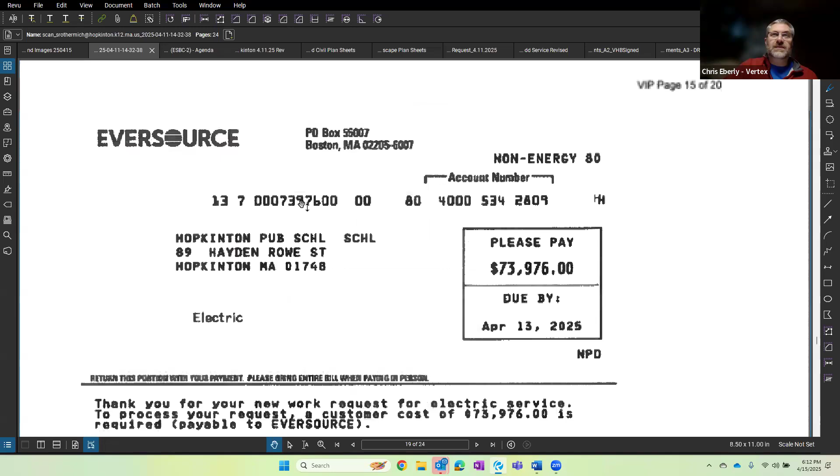And I'm just going to point out what I really enjoy is that this looks exactly like the Eversource bill we all get at our house, except obviously, hopefully, this is a larger number than most people get at their house. It literally looks exactly like an Eversource bill. It always shocks me.

Of course. So the process for starting utility service with Eversource is that you establish a work order number, you meet certain requirements based on their standards, you send it to their engineering department, and they come back and give you a utility charge. The reality is that is a many month, often more than a year process to get to this point. So this represents the initial utility charge that the town of Hopkinton will pay in order to establish service at the new Charleswood Elementary School.

So this covers things like the delivery of the transformer, taking the primary lines from the street to the transformers, and all the associated work. It also includes the power components that are related to the vehicle charging stations, which we're doing through an Eversource project. So this $73,976 represents the town's share of that utility charge, which is calculated through a formula that Eversource keeps to themselves to determine how much it costs to establish this service versus what their payback is going to be with you receiving their service over many years, and the revenue generated by that.

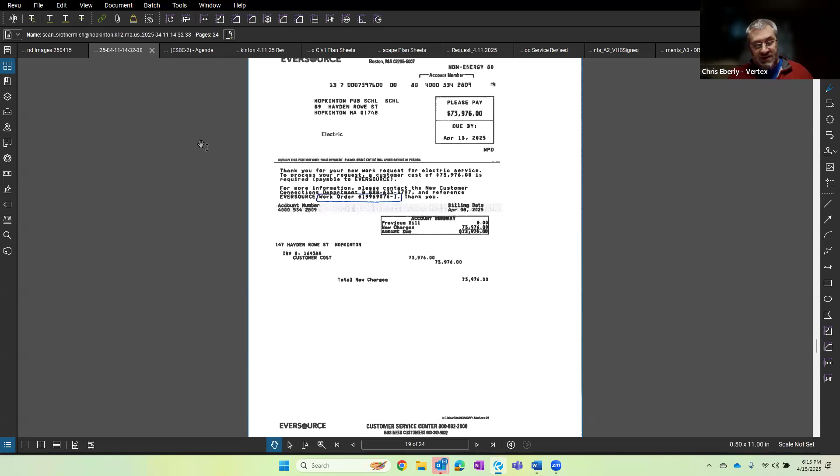So we would be looking for a motion to accept the utility charge from Eversource in the amount of $73,976. So moved. Second, Mr. Chairman. Okay, so motion by Shahidul, second by Mike. Just want to allow if there are any questions or comments on this before we go ahead and take a vote.

Okay, then it seems like we're ready for a vote. Bill, yes. Jagroot, yes. Mike, yes, sir. Chris Masters, yes. Tiffany, yes. Shahidul, yes. And I am a yes. So that is approved 7-0 unanimously.

Okay, next up is the actual payment of bills. So we have a larger invoice package this month. We've got 5 invoices. We've got an invoice OPM 11636 from Vertex in the amount of $72,218.33. We've got invoice 0095421-00015 from Perkins Eastman in the amount of $325,775.

We have an invoice from the Hopkinton Police Department, 25-000171, in the amount of $232.24. We have an invoice from Harrington Heep LLP, invoice number 1650, in the amount of $225. We have an invoice 11969076 from Eversource, as recently discussed, in the amount of $73,976 even. The total invoice package is $472,426.57 this month. Any questions about the invoices?

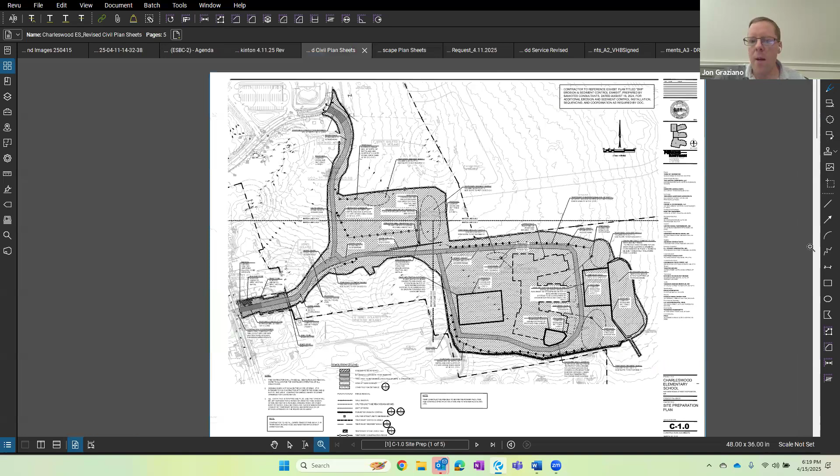Next, we are moving on to a series of project updates, starting with the Conservation Commission update. So Chris Eberly, I will turn it over to you. Now, this one's a fun one. We notified the committee that we would be reappearing before the Conservation Commission last week. As we neared the end of the abutter discussion, Mike and I noted as we were out there that we saw a flag in the middle of the location right about here that was placed when the soil testing DigSafe was called in. We looked at that and then met with the abutters and discovered that what exists currently on our neighbor's property is a flowing stream that comes out of a pipe about here, does this little S, and comes to a catch basin that was previously probably pretty well shielded with some brush.

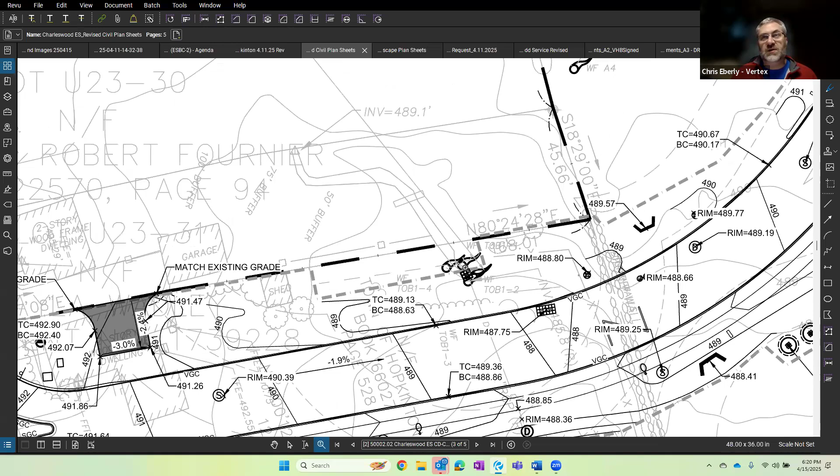About the same time period, it was alerted to ConCom and also to LEC, Perkins' environmental permitting consultant, that there was potentially an intermittent stream as described by the bylaw that was coming onto our project. That's significant because an intermittent stream has buffer zones that were not part of our original order of conditions. We aren't really sure how this got missed. It's quite possible that it was dry at the time that we were doing our initial wetland survey. It was not caught as part of the ANRAD process when we designated the wetland boundaries

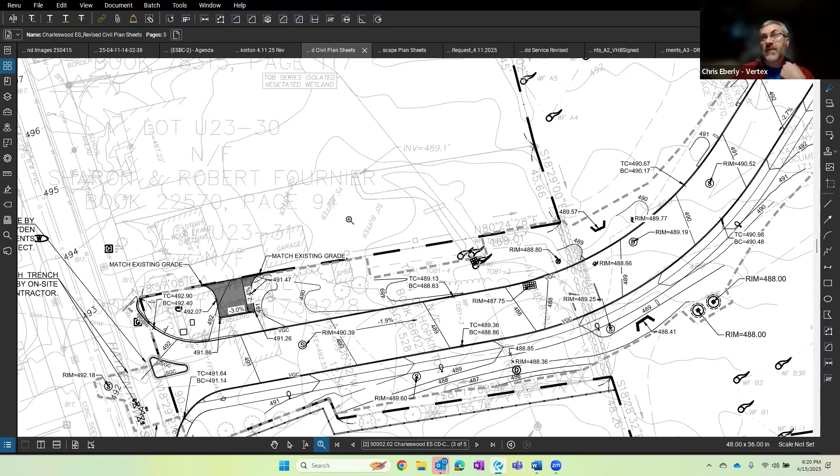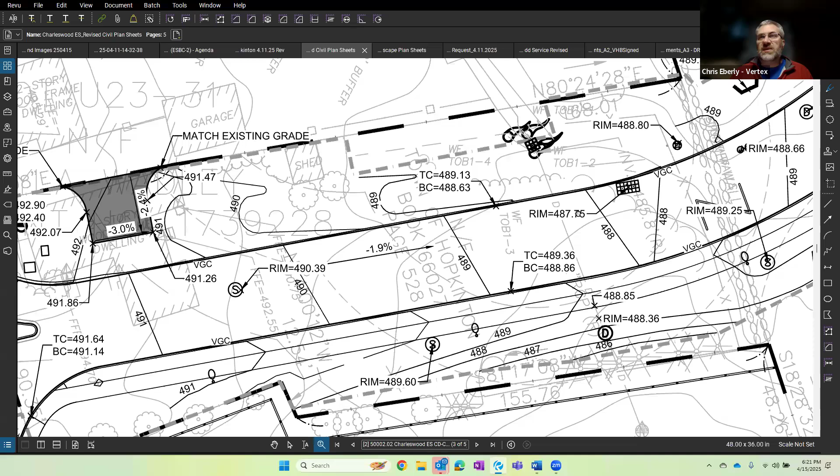that we would be using for the project. And as a result, and you can loosely see this, I know there's a lot of lines here, there is a buffer zone that you can see delineated here, and a closer buffer zone here that are the setbacks related to the stream. We went before ConCom last week so that we could understand this and take action on it. We asked them if they would consider dealing with it administratively. And their response was that in order to keep it fair and consistent with how they deal with these issues across town, with all applicants,

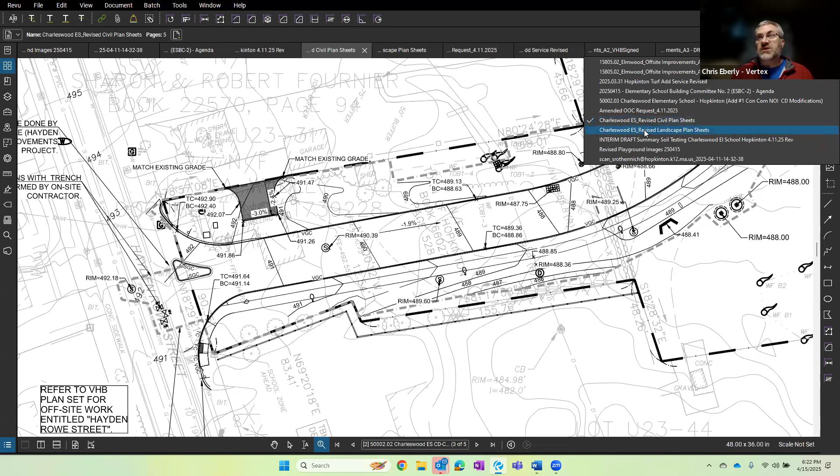they asked us to submit an amended order of conditions request. And so within the meeting packet, there's a folder that contains the updated landscape drawings as well as the updated civil drawings and the amended order of conditions. So you'll see that in terms of these sheets that I'm showing you now. The updated landscape plans include some of the updated plantings that reflect what we talked about with the buffer.

It includes the turnaround that we discussed for the abutter at this location. So we'll now take this information, both the revised plantings and the fence location on this side, and the revised plantings and the new fence location on this side, back to both of those abutters to notify them where we ended up. And we will be appearing at the Conservation Commission for them to consider this at their April 29th meeting.

Because of that and the impact that that has, an order of conditions typically is issued 3 weeks after the meeting where it is approved. So we are hopefully going to be approved at the meeting on the 29th. But because that is so close to the original bid date for the overall project, we are pushing the bid date back from what was originally going to be May 5th to May 14th.

The schedule for the project is based on having notice to proceed by June 6th, which allows us to finish on the scheduled date of October 27th. So provided that this committee and the town can enter into a contract with the low bidder between the 14th and the 6th of June, we don't anticipate this to have any issue on the overall schedule, and it'll allow for us to get the ultimate order of conditions that is amended to be actually given to the contractor, which mitigates some potential change order risk there if there's an item that applies broadly to the project that wasn't in the original order of conditions.

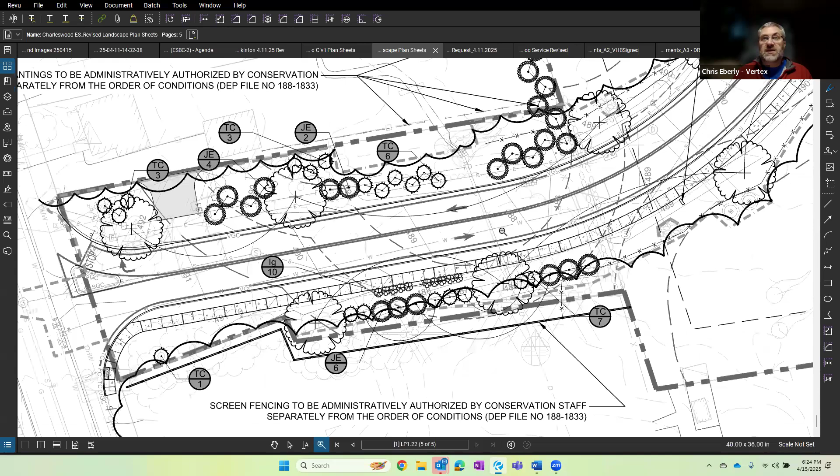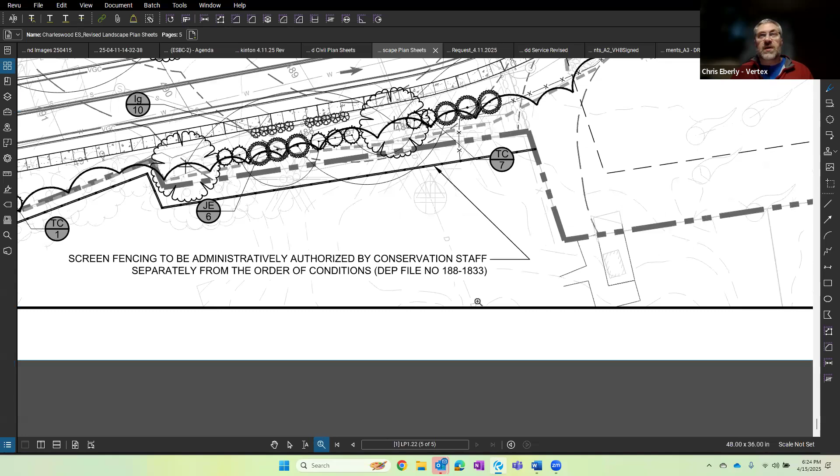As part of this, when we met with the town DPW, they did make the reasonable suggestion that the portions of this drainage system, which appear to be shared between the neighbors, continues underground from here north through the backyards of the properties, and also appears to continue on. It's not entirely clear exactly where, but continue on through the backyards to the south. That the portions of this that are on 147, so this drainage structure and the pipe itself that goes under the road, that we replace those at this time.

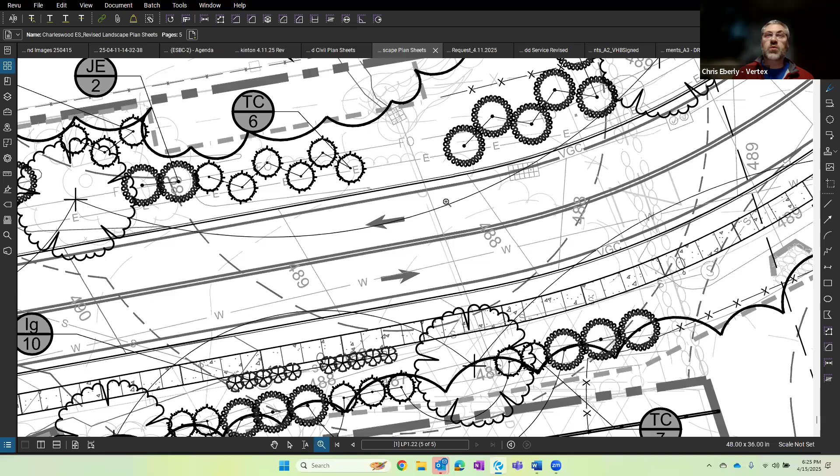I think that makes sense overall, and I would agree with that assumption, because you wouldn't want to pave a brand new road and then have to dig it up in the first few years to replace that drainage structure if there was a problem with it. So restore what is on the town's property to a new condition, and then whatever happens in the future, we'll deal with that. So that's largely the sort of outline of the Concom process.

We do know that the plans have been submitted earlier this week. Hard copies, I believe, were delivered Monday or Tuesday, and we anticipate being on the agenda for that meeting. So unless there are any questions, that was all that I had for that particular. Yeah, sorry, I forgot I was on mute. Does anyone have any questions regarding any part of this?

Just one quick question through the chair. I heard you mentioned there's no schedule impact. Is there any cost impact? There is probably going to be some minor cost impact associated with having to dig up that piping and that structure. Based on pricing, I would think it'd be less than 40,000 overall, which in the confines of a $116 million project is not significant in my book.

And it's certainly a lot less cost impact to deal with that pipe now prior to bidding than to do it as change order work if we were to need to do it over the course of construction, such as if that pipe collapsed from the weight of construction vehicles driving over it over 2.5 years. Makes sense. Yep. Thank you. Any other questions? Okay. I think we can move on, Chris.

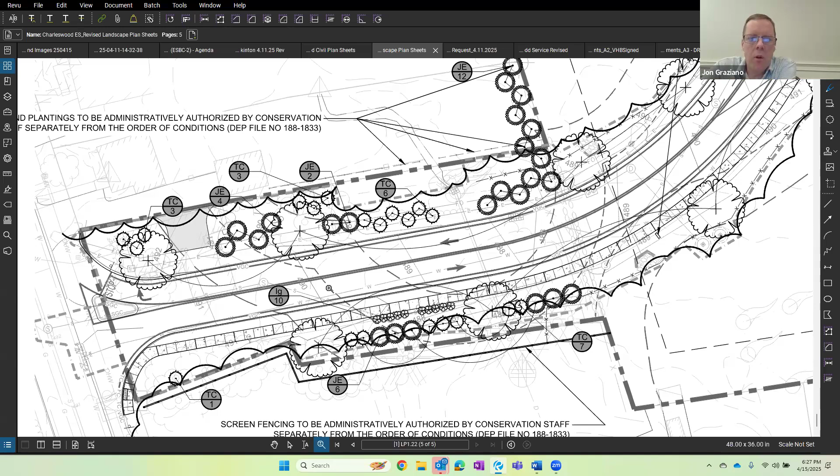So next on the agenda, if I have it in front of me, was the revised playground. So we had talked at the last meeting about the goal of creating an adaptable playground. At the time, we discussed the various options and the various goals for the project. This stems from work that Susan Rothermich is doing at Marathon to create an adaptable playground where able-bodied and disabled students are able to play together on the same play structure.

The goal of that separate project is to create that, I believe, at Marathon. And the discussion we had last time was to create a similar opportunity at the Charleswood School so that when those students graduate from Marathon, should that playground be built, the same idea of inclusive play would continue at the next school.

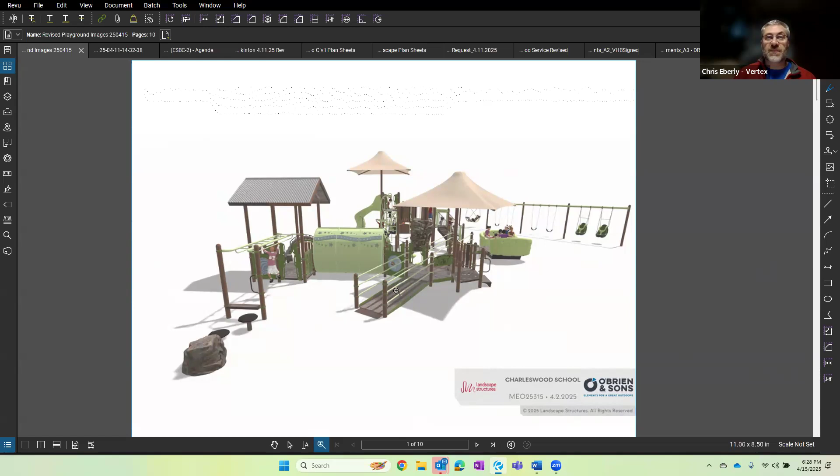The Traverse, the landscape architect, went through a vendor and took the suggestions made during multiple working group meetings and came back to us with this proposal that they'd like to incorporate into the documents. So this creates varying degrees of ramp structure. It creates a tunnel that is accessible, that someone could utilize either able-bodied or in a wheelchair.

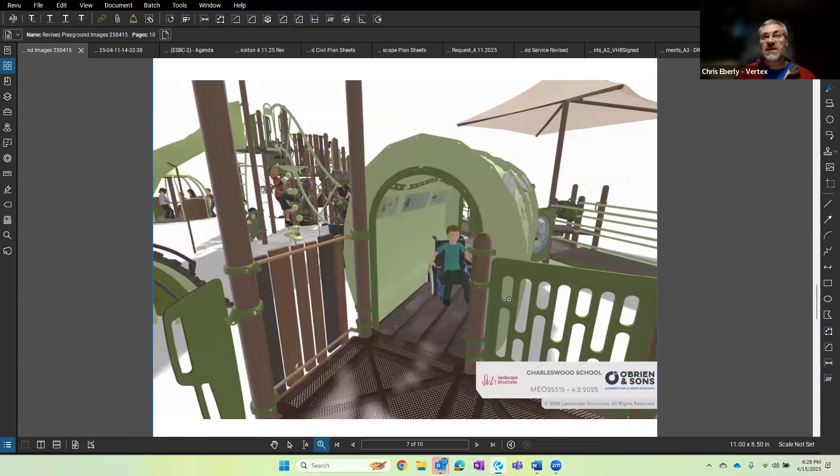It also creates opportunities for disabled students to interact with some of the ground level items that are part of the playground, as well as upgrading the overall quality of the play structure that was proposed to begin with so that it provides more opportunities for play. Some of these swings here, you can transfer from a chair if necessary. Some of these ground level elements, and you can see the use of the tunnel. And also there's a seating area that can be used by able-bodied students, or you could bring a wheelchair up to it.

We reviewed it with the working group, and they were in favor of proceeding with this play structure. So we would just be looking to endorse that with the committee as a whole, so that this would replace what is currently proposed in the north playground. It also adds additional shade structures that were not part of that original playground. So all in all, it just provides, in the working group's view, and I'll let the working group speak to this, a better solution overall for meeting the goals that we talked about at the last meeting.

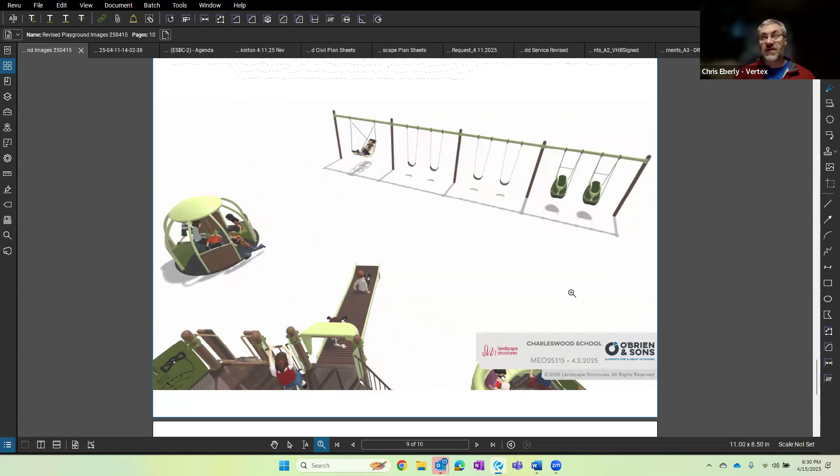I don't have an exact dollar figure. I believe Ashley came back to me that this structure overall is 300,000 for all the elements shown, which if I remember correctly, the original play structure was somewhere in the $200,000 range. So it is a slight increase, but in the confines of a $116 million project, it's not a significant increase, and the town would very likely get much better pricing should we be able to incorporate this in bid, as opposed to waiting until after bid, given the complexities of installing this, the multiple foundations and other elements that go into building a playground.

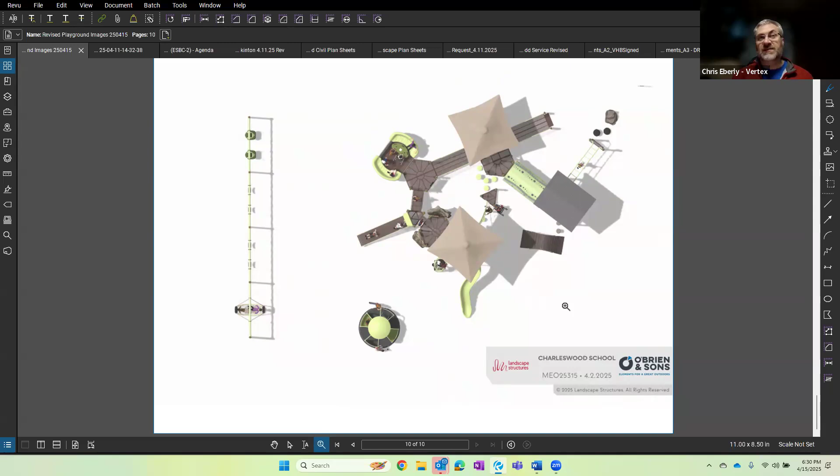And I hopefully can answer your questions. As I stated last time, I'm not your landscape architect, but I believe your landscape architect is currently out of the country. So, before we get to questions, Susan, if I could put you on the spot a little bit, because you've been closer to this type of work than anyone on the committee. I know the working group gave its endorsement, of which you're a part, but if you wouldn't mind just confirming that this would accomplish what we're trying to.

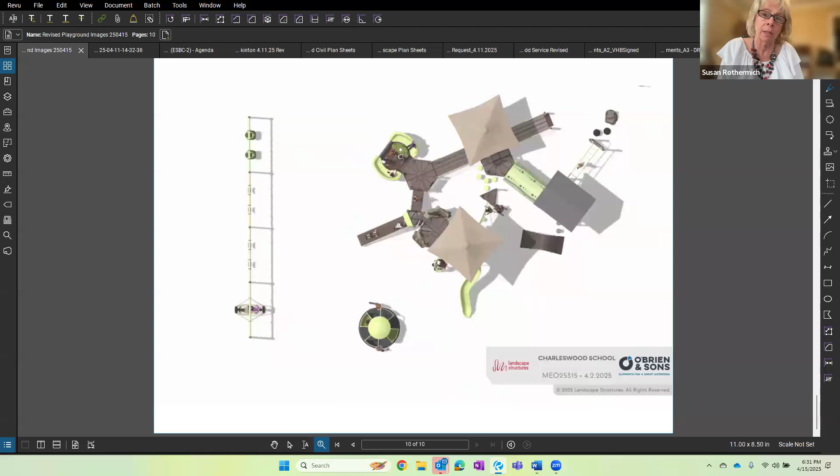Yeah, the nice thing about this structure is it provides multiple elements for all children to play. Just having more touch points where the kids can gather is very helpful with the structure. Originally, it just seemed to have a long runway ramp, but now with those elements that Chris pointed out, it does give the kids multiple areas to play together on this structure. So yes, it's well done now. Thank you.

Questions or comments from the committee? I've got a question. Chris, thanks for sharing this information. Is this the entire amount of structures we would have for the playground? No, and that's what I'm bringing up in the background. Bear with me for 1 second. I want to bring up the presentation that I shared last time. Thank you.

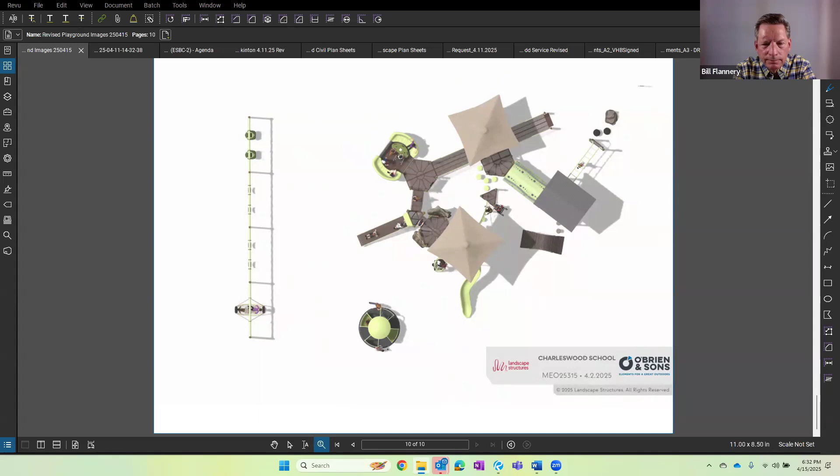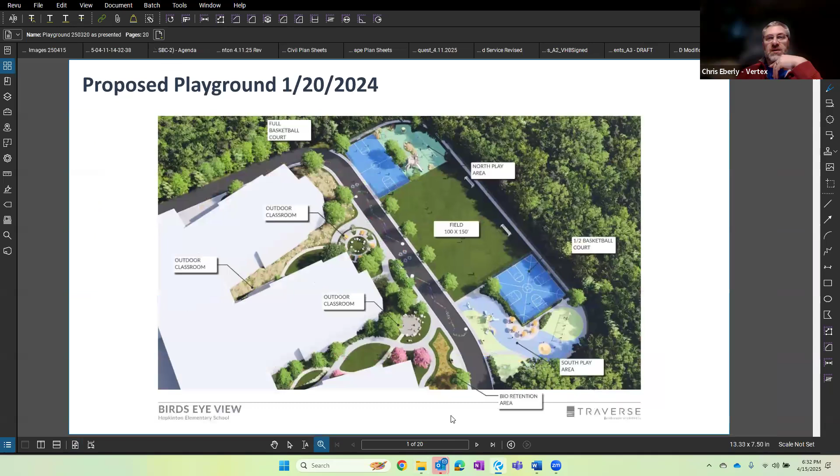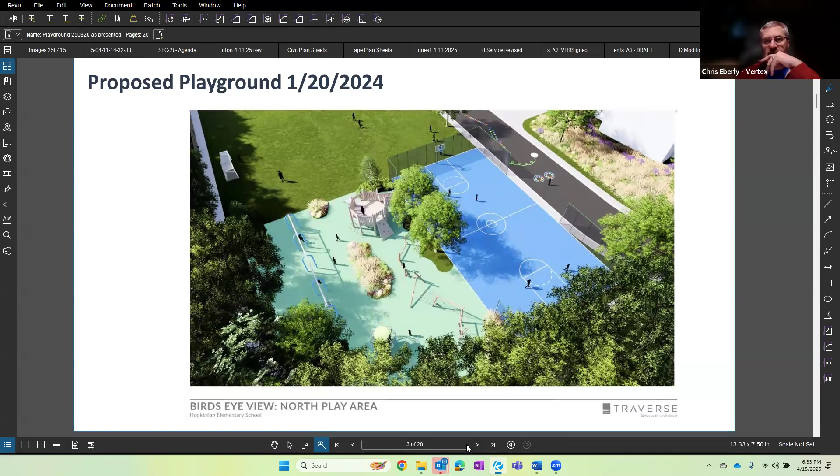So comparatively, last time we talked about the playgrounds are made up of 2 playgrounds, the north and the south play areas. The south play area is made up of multiple structures, and at the last meeting we walked through the various elements that make up that playground. Originally we had this climbing structure, which was various logs and ropes that allowed for climbing. We had a smaller play structure, and we had swings, and I believe that's a spinner. Okay, so these are a lot of the elements on that south playground.

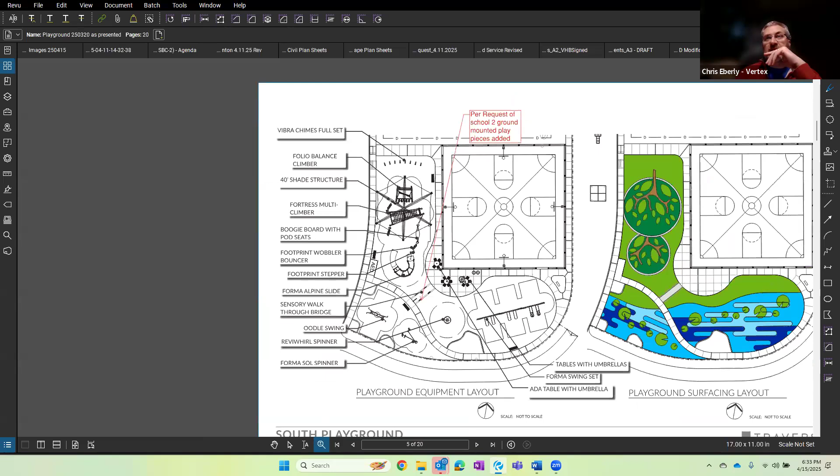And then as we, sorry. And so as you walk through it, there's various chimes. There was a large shade structure. There was a balance climber. Then there was also a slide of sorts, a swing and a spinner, and then swings as well here. And that makes up that south playground. And then this, which I shared in the last meeting packet, so you could refer back to that, highlighted the various skills that the playgrounds are designed to support and develop.

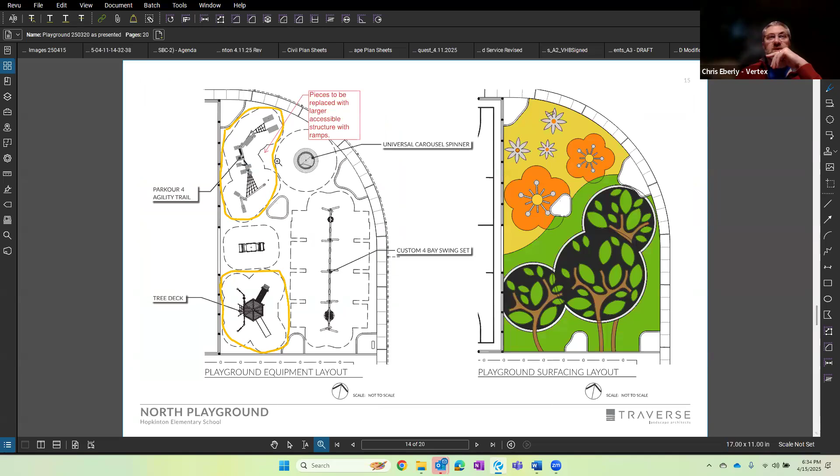And then within the north playground, originally there was this sort of agility trail. So it was various rope ladders and other structures that you could move through. There was a teeter-totter swing element, and then there was the tree deck climbing structure, as well as a set of swings. So the structure that I've outlined in today's presentation would replace the elements that were shown here with that comprehensive solution that is pictured.

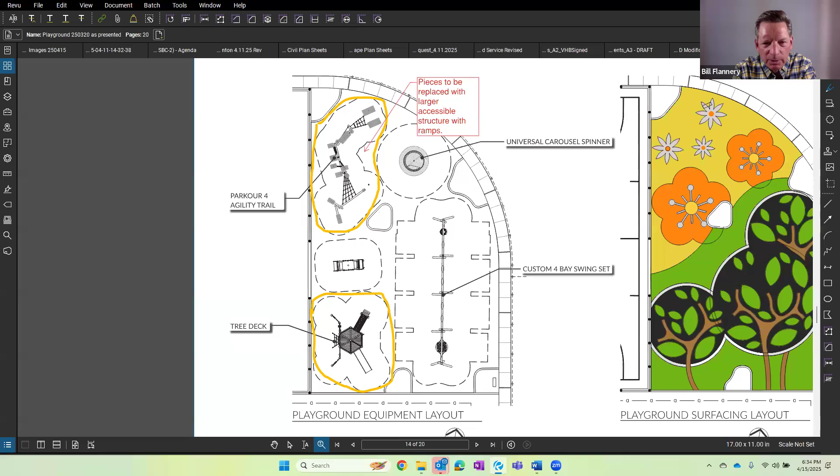Okay, I guess a different way of asking my question or getting to what I'm looking for is what they're proposing for this adaptive enhancement. Would it be for 20% of all the structures for the school, or 35 or 50? Well, what it does is it deletes, let me see if I can bring them up side by side. So the structures that you see depicted here would be in place of the structures depicted here.

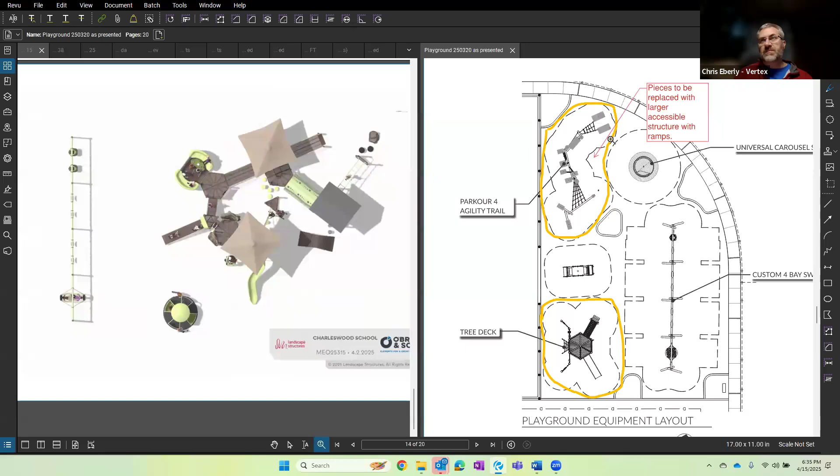Okay, thank you. And so that's 50% of the playground, but it's not a 50% add to the playground. It's swapping out the playground that's proposed for a different playground. Right, but that's 50% of one of 3 playgrounds. It looks like we're 2. Oh, 2. Okay. Thank you. So overall, it's not a drastic upsize of the playground. It's finding better solutions within the planned playground to deal with it.

And I did have an email at some point that was somewhat difficult to read that should have showed the final layout. And I apologize for not having that queued up, but it would probably take longer than it's worth to find it for something that didn't convey it all that well. Other questions?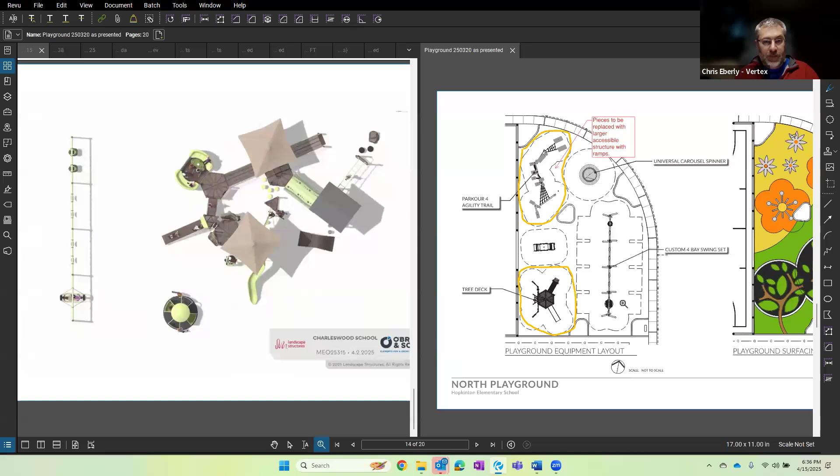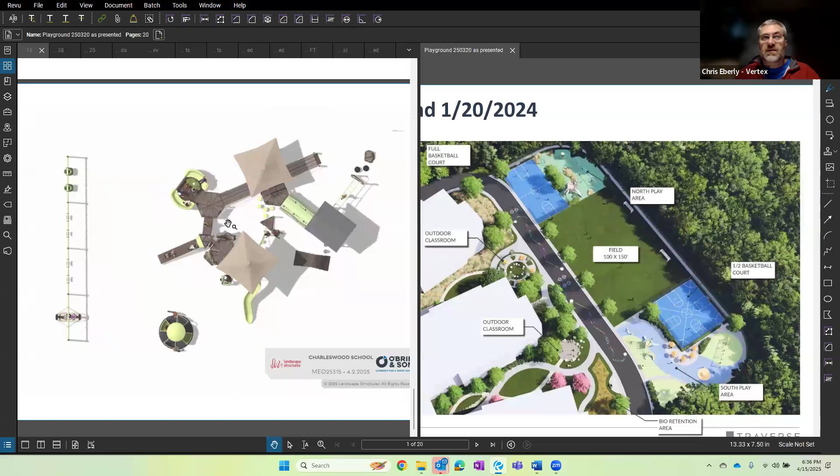Chris, I think you had up earlier a high shot that showed the placement of the north and south playgrounds together. Can you flip back there? Yes. There was one other item that I wanted to touch on as we're talking about this. So, a further discussion that occurred in the working group that is still developing, that we'll get into as part of the ad service, is that we have this north playground up here and the south playground down here. We're working on integrating this type of structure into this playground. We've also discussed this field in the middle.

Hang on, before you do the field, I just want to finish up the playground, because you want an endorsement for that. So the one reason I asked you to bring this up is because for people who may be following along, calling them the north and south playgrounds makes them sound, at least to me, if you didn't know this design well, far away from each other. So what you can see here is that when we talk about the north and south playgrounds, it is sort of one reasonably connected recess complex that the students would have access to.

I think that helps people see it's not like we have one adaptive playground and one non-adaptive playground that students are going to get directed to one or the other; the playgrounds are reasonably near each other. I do want to talk about the field thing, but I think we need to do the overall endorsement separate from that. Does anyone have any concerns or objections with the committee endorsing moving forward with this adaptive playground structure in the bid?

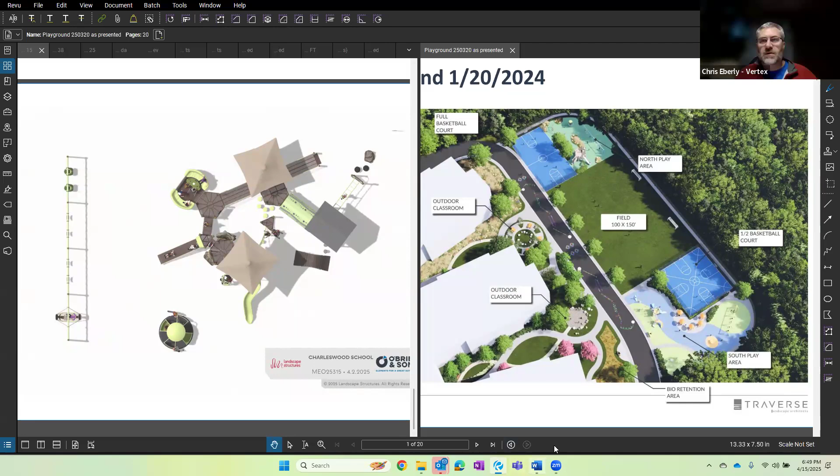Other questions? Any objections to putting this in as an add alternate? Okay, then Chris Eberly, I think we're good to go with this one. All right. I'm gonna stop sharing for a second and open up the one document that I forgot to open.

So I mentioned earlier, I sort of covered our next topic, which is abutter mitigations. We're going to be reaching out to the two who are most affected by our discovery of this intermittent stream and the effects of that as it relates to the Conservation Commission's wetlands bylaws.

That way we'll be able to reach out to them and get an understanding. We're also still working on the street improvement package. We don't have a bid date for that yet, but one of the additional services will move that along tonight, assuming it's approved.

We did want to make a suggestion as it related to the abutters that we've done in some towns. And I'm going to preface this suggestion with our experience in proposing this. What we have done in some communities, when you get to about this time, is we have proposed to the neighbors to do an existing sort of pre-construction survey of their property so that we can understand the level of quality that it's at, so that they can have a record of what their house was like at the start of construction. In the event that the vibration, I'm not sure if blasting will be necessary or not, depending on how much rock we find.

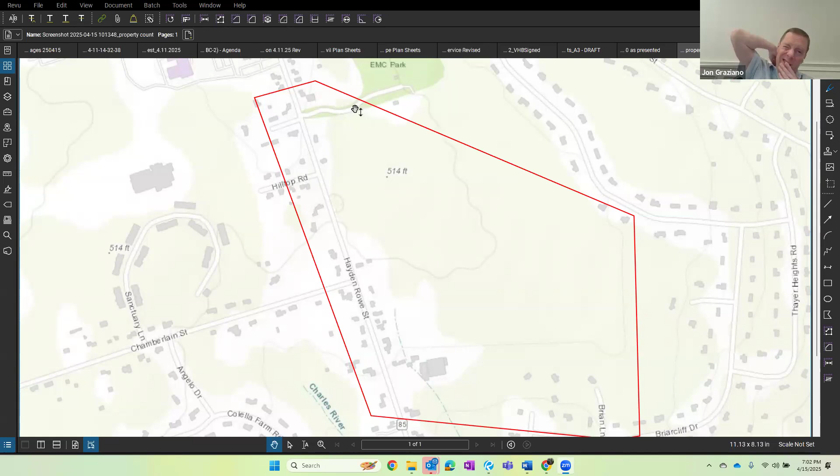I don't know that I have a great answer for you, Bill, in all honesty. It's an option that provides additional protection if you choose to move it forward, and purely moving it forward doesn't necessarily mean that all these folks are going to take you up on that. And when you say protection, I mean, it potentially offers additional insight. It's not clear that it offers additional protection. That would be sort of situational. Well, no, it would if they're claiming a crack in the foundation that was already there, right?

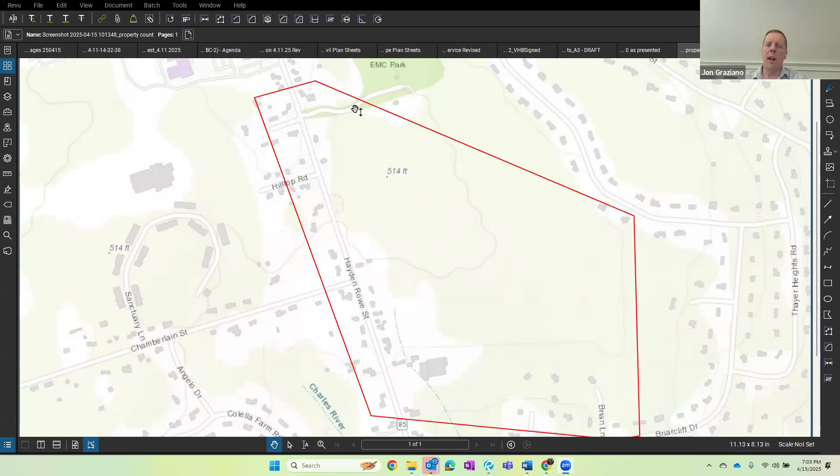Yeah. So I guess if all you're looking for is a consensus to have a bid, I personally don't see any downside in getting a bid for what it might cost, and then whether the committee agrees to offer it, that's another consideration. Yeah, I think I would agree in that more information is beneficial. So again, getting the bid would be good. I don't know if this would affect the bid at all, but I would feel pretty strongly that we exclude the new construction Toll Brothers development, because, as you said, you can't really survey an in-construction home, and it's a brand new development.

Now, so we can certainly get a proposal, and I can bring it back to you at the next meeting. The other question would be whether this is the right radius to consider, for lack of a better term, or the right boundary to consider in terms of the homes that we would include. The building itself is roughly right about there.

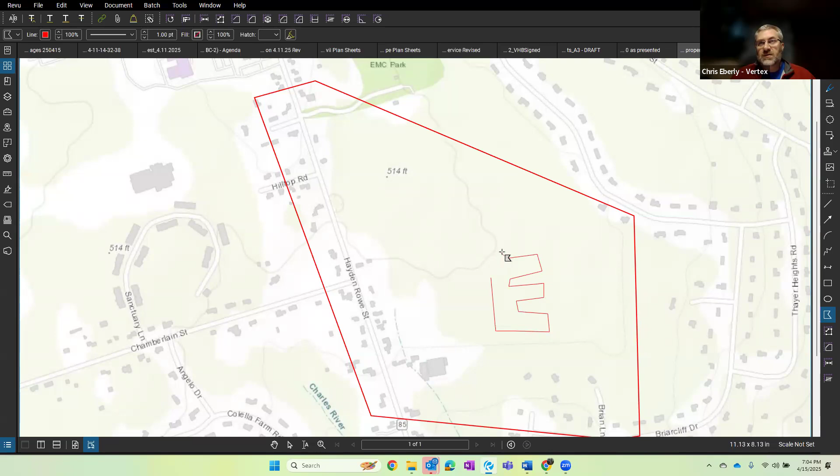Dan, don't judge my architecture. That looked pretty good, actually.

So the building itself is likely there. You've got the roads that circle it. I think the most impacted are likely the folks in this neighborhood downstream. Yep. That's where I would focus this, is down there. Potentially, you could also include the neighbors who are going to have the traffic rumbling through on 85, and potentially the next step up would be to include all of Hayden Rowe that's going to be within a certain distance of the scope of the roadway improvements.

Chris, how will that quote come in? Will it come in per house as you suggested, or will it come in as a lump sum? Usually it comes in as a lump sum and then there's a per house number along with it. So if we buy it out for 20 homes here and then 10 people say no, we'd adjust it as such. Okay.

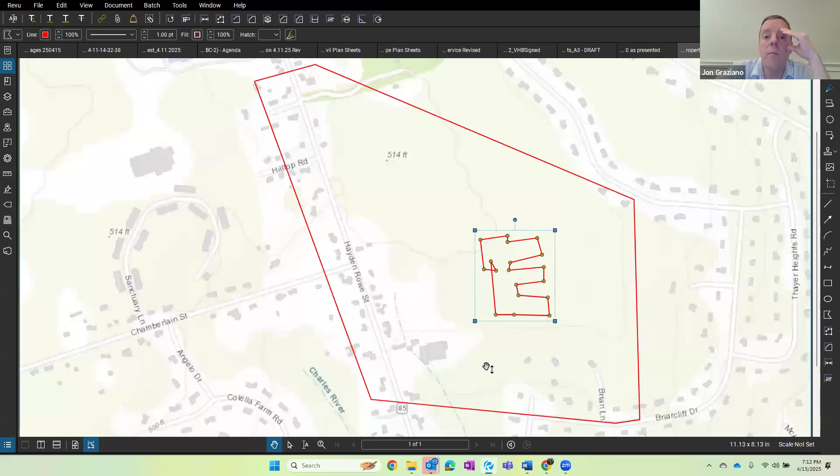Okay, Chris, do you have clarity on the next steps? Yep, I think so. The one thing I don't have clarity on: do we want to extend it to the full roadwork scope, or do we want to just limit it to the immediate neighbors for the purposes of the initial proposal? My personal thought is immediate neighbors. So maybe worth checking with the town if they've done anything similar on road work that has been done recently. Yeah, I think if the town's never done this for road work anywhere else, I would be hesitant to do it here. I agree. Okay. My vote would be for immediate neighbors.

My experience, it's usually based on a distance. If you are within a certain distance of the active construction, say 500 feet, then it's more of a concern. But if clearly some of these residences are not within that threshold distance, then I would say prioritize the ones that are closest to active heavy construction. Yeah, when I first started talking about it, we looked at the center of the site to 1,000 feet, and it really became those four. Maybe you extend it down to include, I think it's 9 houses in total that are down here.

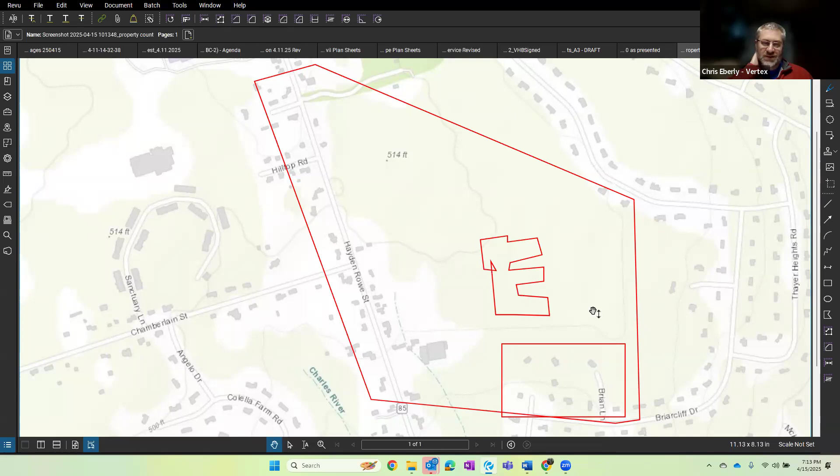And Chris, pardon me if you already answered this, but were there any claims from the Marathon project? The only issue we had was water, and the circumstances of that are a long story that I don't want to get into now. But not structural with any homes in the area? I don't believe so. No, nothing that was ever brought to our attention.

The vibratory compactor is always the one I point to because people find it unsettling when everything starts shaking a little. But I don't know that I've ever actually seen a direct claim that I can tie to that. Okay. Because they're not driving it next to your house. It just feels like they're driving it next to your house because it can carry through the soil.

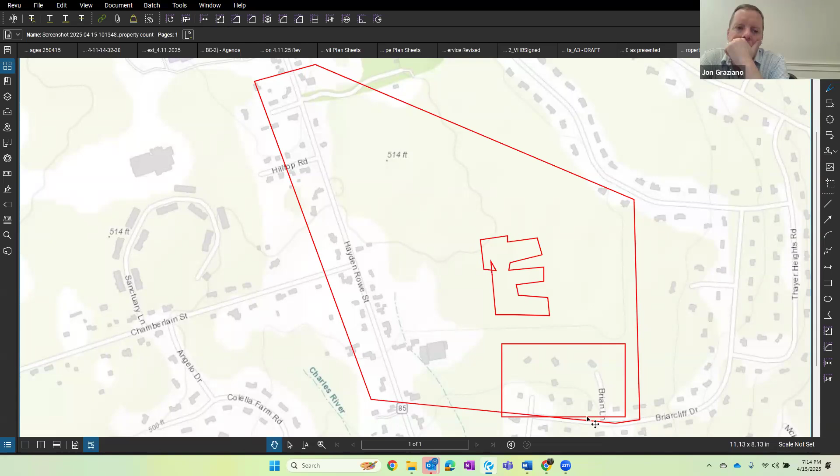All right, so should I start with these 9? Yeah. Okay. Okay. What's next? Next.

So next is to walk through a number of additional services. I'd shared these with you, Jon, but we're so close to the meeting that I thought it made sense to just run through them with the committee at this point. Yes, please do. So I have 5 in total. I am expecting one more, and I forgot to write down who it was from. So when I get to the end of this, Dan can tell me who I forgot.

So, starting with VHB. VHB is traffic engineers working on the roadwork improvements. As you may recall, we had an extended back and forth with ConCom as a result of trying to get through the right-of-way improvements, and ConCom kept asking for additional as it related to catch basins and trapping the suspended solids before they were discharged into the adjacent stream. We thought country drainage was the right way to go. We proposed multiple versions of that. We proposed a few alternatives, and ultimately they asked us to do a study of the additional catch basins that would be required to deal with that extended stream study to get through permitting.

They're requesting a $6,600 additional service for additional engineering work that's related to that original ConCom right-of-way approval. My view is that I think that that's reasonable. They were very diligent in doing this work. They tackled it without delay, which I think helped us get through that approval. And so I think the 6,600 they're requesting is reasonable.